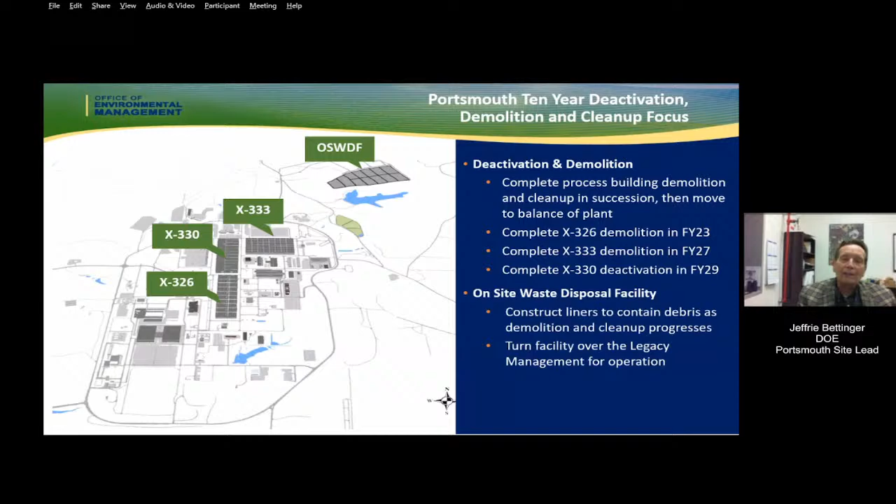And our goal is to complete demolition of the 326, and we're currently working on deactivating the 333 so that that highly skilled crew can just move right to that next facility.

These facilities are mostly structural steel, concrete. There's a lot of electrical switchgear in them, so there's just that sheet metal that's involved in those. And so we're taking all of that and we're taking the big pieces and making them into small pieces. Same thing with the piping that's in there. We're able to do that.

Sometimes you'll see other demolitions and they'll just use fire hoses. Lessons learned from other facilities are that these are much more effective. We can also add material to this to make it work better, we call that fixative. The biggest thing we strive to do when we're doing this demolition is to do it safely from a physical point of view, but also to keep the dust down because that controls any contamination from leaving. We've sprayed fixative in the building in a lot of areas, and then we've sprayed fixative on the transite, which is the asbestos sheeting on the outside.

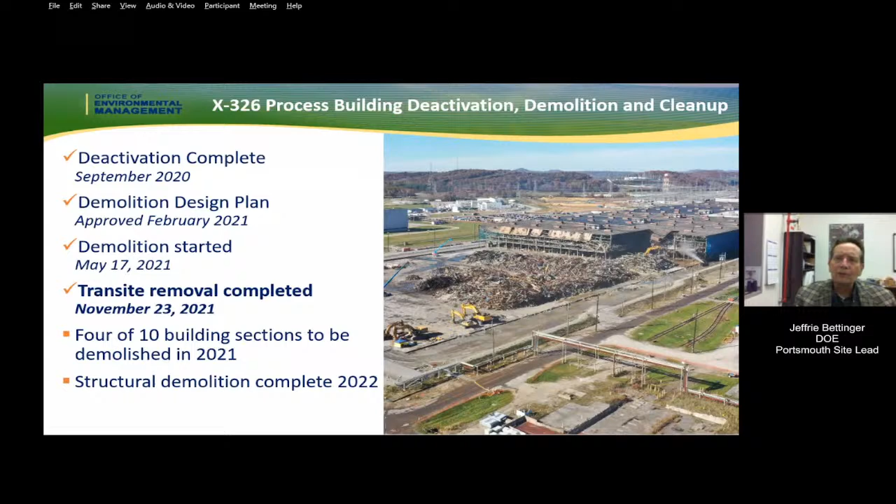Could I have the next slide, please?

When we take this material up to the on-site waste disposal facility, it's a bunch of irregularly shaped material. Beams, things like that. There are size criteria for them, but when you put them into the on-site waste disposal facility, there's a lot of void space. And that's not a good thing, because when you have the void space, it means that things will settle in the long term. So what we do is we put soil in there, engineered fill. It can't just be any kind of soil. We like soil that's got a lot of clay in it, that meets the approved engineering criteria for that. We've worked with Ohio EPA to validate that the soil we have on site meets this criteria.

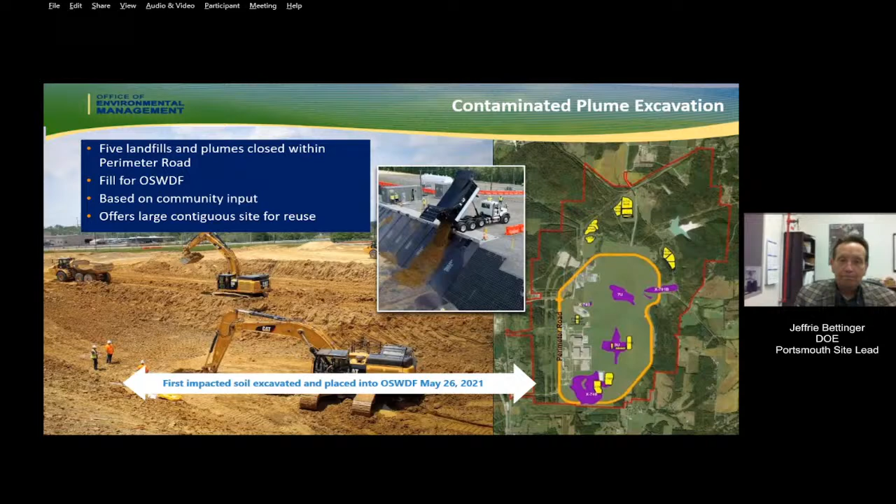And then more debris goes on top of that. It's like when we're baking a cake and putting different layers together. So that cell is actually active, and all the rainwater and any leachate generated from that is collected and treated prior to going to one of our permitted outfalls.

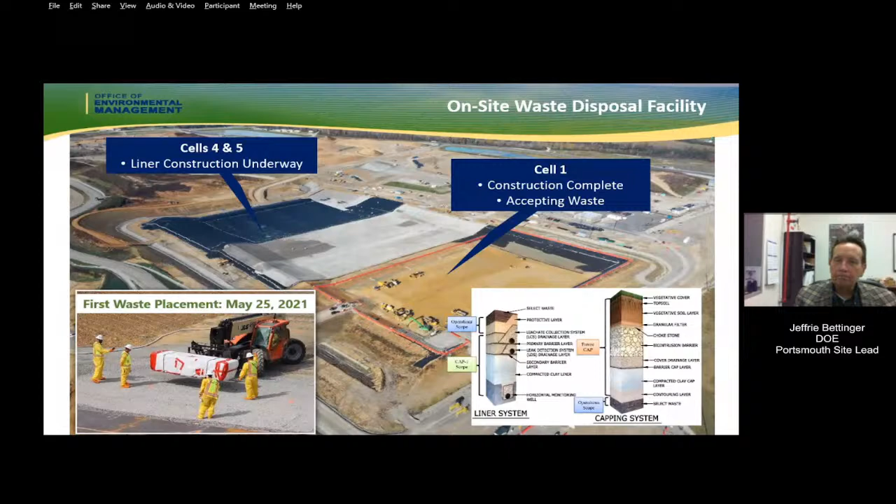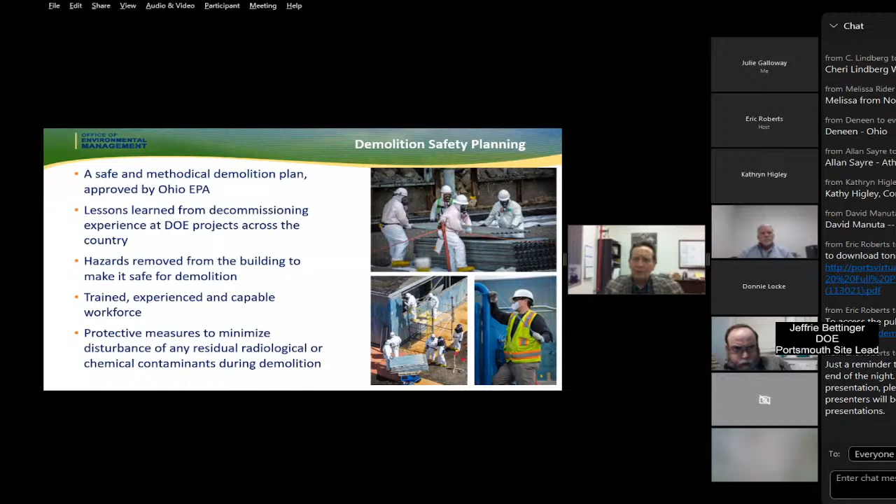So how do we get together and plan a job like this? Well, we're engineers, and what we do is we make a plan and then we work a plan. When we're putting our plan together, we rely on several things. We rely on our knowledge and procedures and things we're taught on how to do things properly. There's a lot of regulations, safety regulations, OSHA regulations, that guide us in doing this. But one of the main sources in most of these regulations and guidelines are lessons learned from other projects. That's why the regulations get updated, to incorporate lessons learned.

We have the advantage of being part of a large complex doing similar work in Oak Ridge and other places. They did take down the former gaseous diffusion plant in Oak Ridge, so it was a great source of lessons learned, and we take those and apply them. I mentioned a few: one was the use of fixative, which we use in higher concentrations than they did at Oak Ridge. We also put in that berm around the building that collects all the water from it. That was a lesson learned from Oak Ridge, to make sure we collect and treat it.

In addition, we did some things that are just common sense. We removed the hazards from the building to make it safer for demolition. We make sure we use a trained, experienced workforce, people who have been at the site for numerous years. They're familiar with the way we do business and the high safety standards we use. That trained, experienced workforce is a definite asset in everything we're doing here. And as I say, we have these protective measures that we use.

Could I have the next slide, please?

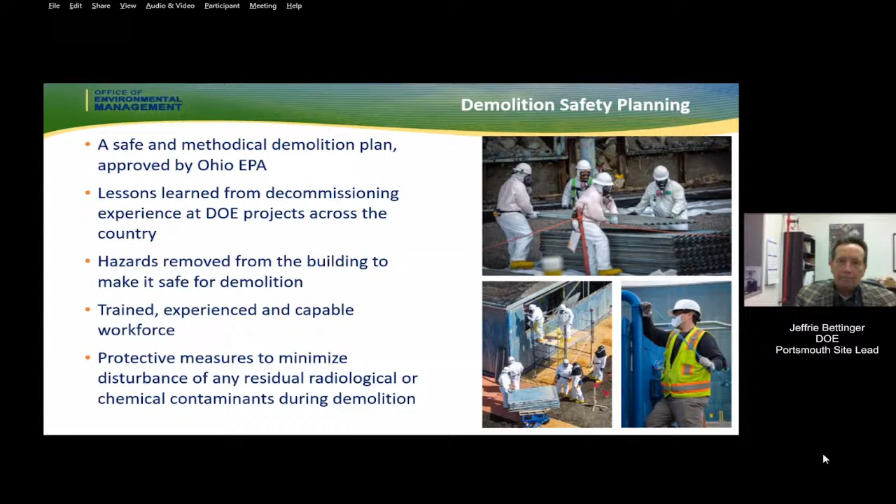It's great to make a plan, but you have to check it. We have a saying here: trust but verify. What I want to talk about is the way we're verifying that we're bringing this building down safely and controlling any contamination through monitoring.

We spoke a lot last month about some of the real-time monitors that we put in. Frank talked a lot about it, and he's going to talk tonight about some of the other monitoring systems we have in place.

We put these in as a layer. Kathy's going to talk later about the philosophy of this, but we monitor close to the site, mid-range from the site, and at the perimeter of the site. So we have multiple layers of monitoring.

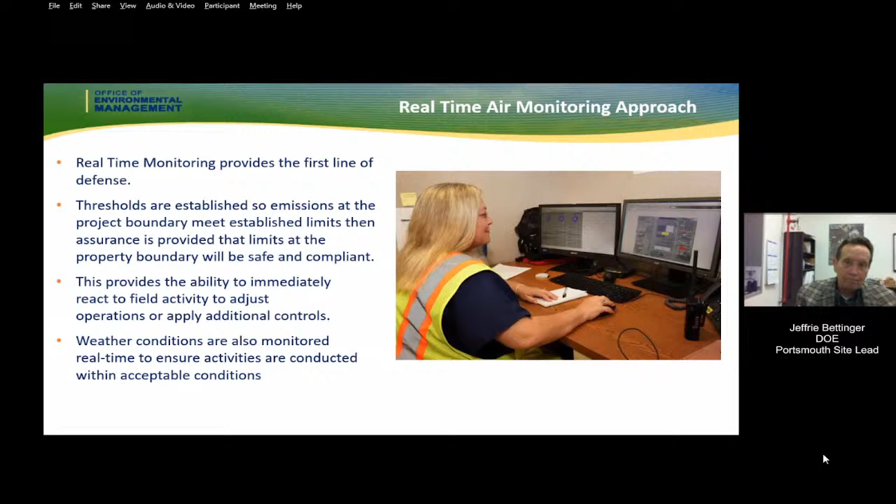All the data we've gotten since we started demolition has shown we're doing a good job controlling dust. We're monitoring for that with particulate matter and finding we have good control. The water and fixative applications are effective.

We're also monitoring for radiological releases with some real-time measurements, and it shows we're being protective of workers—the detection limits are minuscule, if anything at all, in what we're seeing. Could I have the next slide, please?

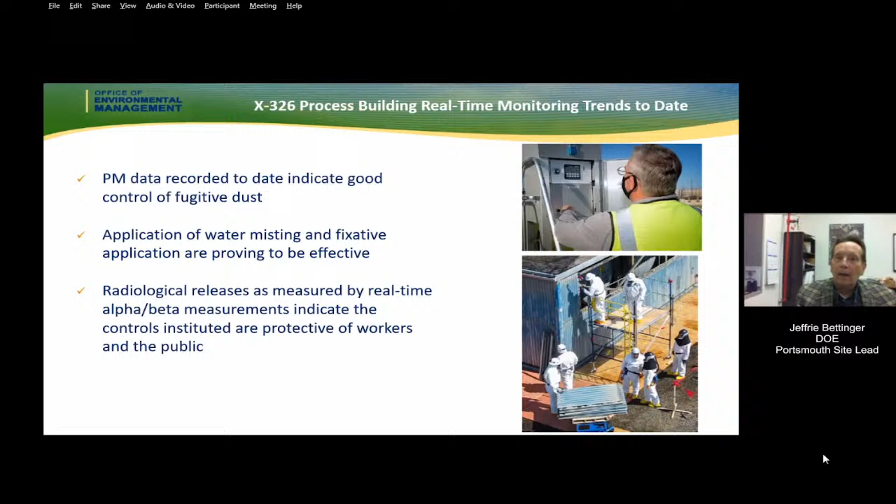Now what Frank's going to focus on tonight is the co-located monitoring system. A couple of years ago, when we were getting ready to start this, we got together with the Ohio Environmental Protection Agency and the Ohio Department of Health and proposed to co-locate monitors here so they could do an independent verification of what we were doing when we were sampling, so the public could get data from their trusted representatives within the state.

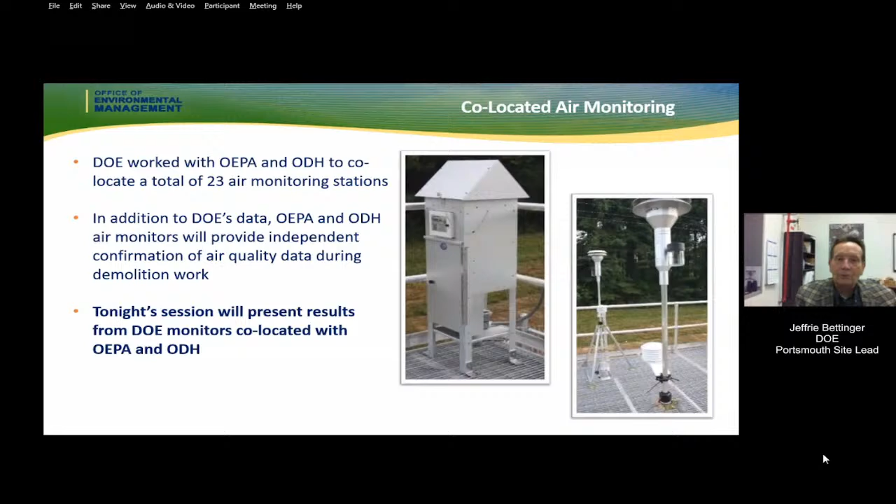So we actually installed 23 air monitoring stations to provide this independent confirmation. Frank's going to talk about what some of the data has shown, and a little more about what those monitors are and where they're located. And with that, I'll turn it over to Frank. Thank you.

Okay, thank you, Jeff. My name is Frank Johnston. I'm the Director of Environmental Protection for Fluor BWXT.

Jeff did provide a good intro into what we're going to talk about tonight, because we did spend some time back in October, our first couple of public meetings, talking about that real-time data—not only what the performance was telling us, which was that it's been pretty good so far, but how we were using that real-time data to control our activities, since that gave us insight into when we might need additional controls or improve the controls that were there. So we spent a lot of time talking about that real-time data for particulate matter as well as for some of the radiological constituents.

As Jeff said, tonight we're going to expand our focus a little bit. We're going to look at some of the monitoring systems we have beyond the project boundaries. We'll get into that here in my section of the presentation.

So just a little bio, a couple of bullets there. I've had 37 years of experience. I'm a chemical engineer by degree, worked in the environmental field all my professional career, 31 years on demolition and environmental remediation projects similar to what's going on here at Portsmouth. I've been working at Portsmouth since the beginning of our contract back in March of 2011. Next slide, please.

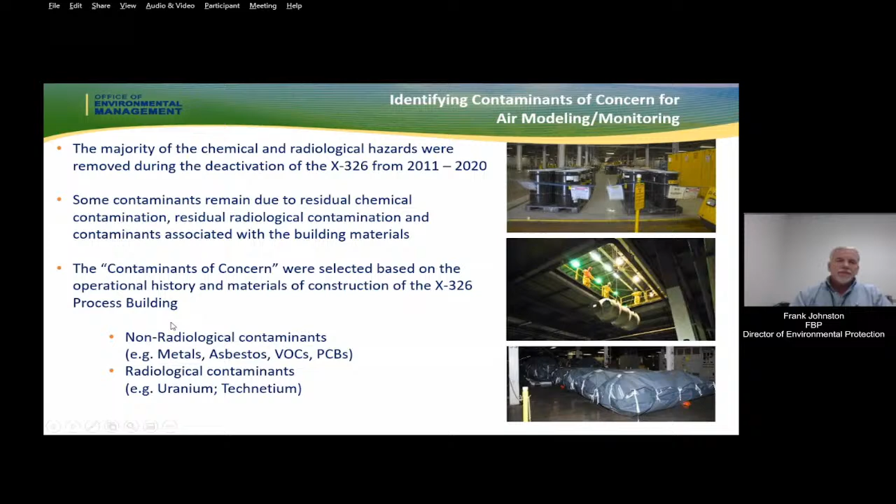So during the demolition design effort for the 326, we did a comprehensive air modeling effort. We didn't look at just the sources of our contaminants, like the demolition facility, the demolition project, and the on-site waste disposal facility, but we also looked at the cumulative impact from all these activities - what was going to be the impact on-site as well as at our property boundary and off-site. So we did an extensive air modeling effort to determine our impacts, and we concluded that with the proper controls, we could successfully do these activities and meet the regulatory requirements and environmental standards we needed to meet at the fence line and beyond.

This air model was peer reviewed by an independent expert brought in by FBP. It was also reviewed by an independent expert brought in by the Department of Energy. We provided this air model to Ohio EPA for their review, and they approved that model on May 20, 2020. So that model demonstrated we could meet our requirements, but we were also using that model to develop the air monitoring program we're currently implementing.

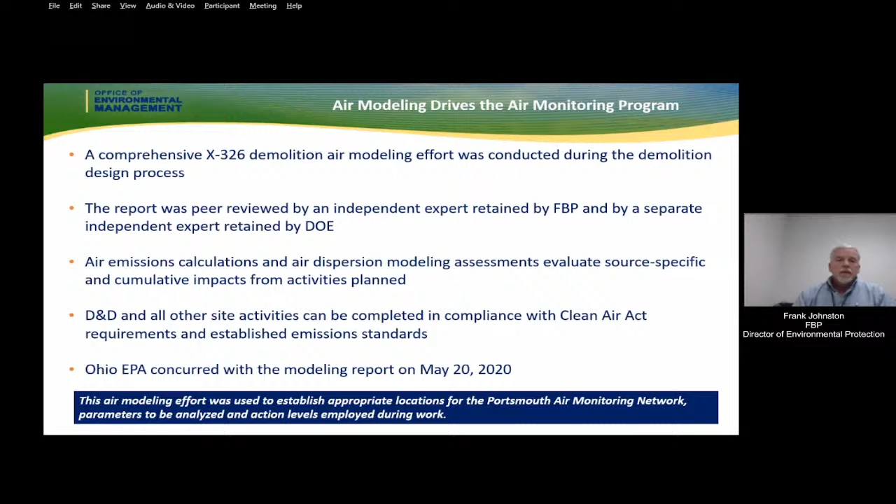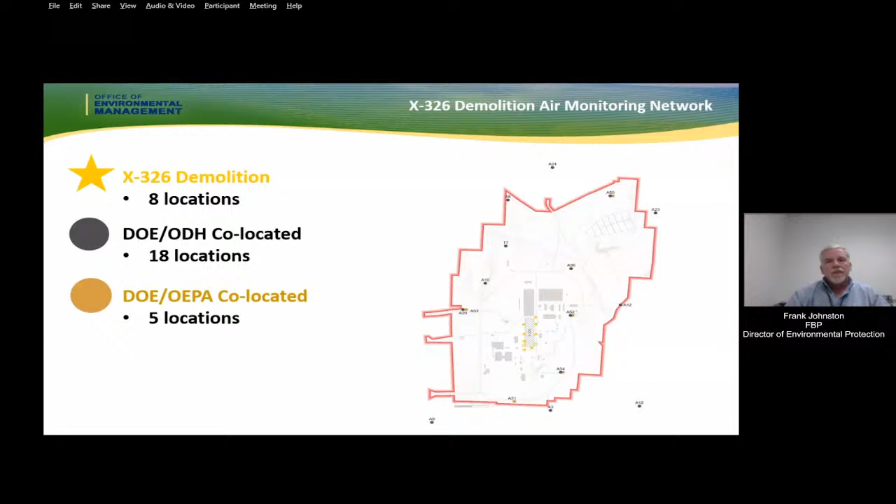So co-located monitoring is exactly that - when I say co-located, the sampling devices are literally right next to each other. The Department of Energy, the Ohio Department of Health, and the Ohio EPA have come together and installed these monitoring stations. It provides redundancy in the air sampling to help confirm that our air emission impacts from on and off-site activities are consistently measured. It provides regulators, our public, and important stakeholders an independent mechanism to evaluate all the air emission data collected, and it provides an increased level of transparency with state regulators as well as our neighbors and stakeholders.

The Department of Energy stations we'll be discussing have been there for years and years. The Ohio Department of Health has just recently co-located their stations next to the Department of Energy stations.

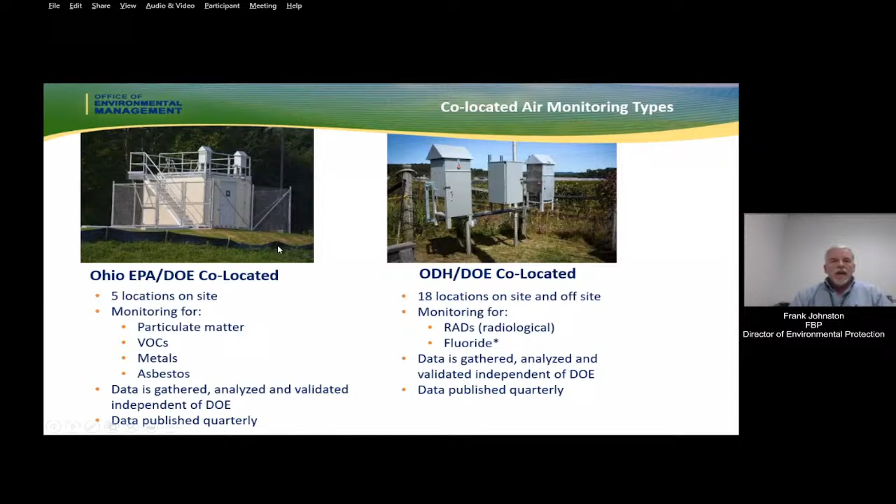So we've got quite an extensive collection, validation, and reporting process for the analytical data we're going to discuss tonight. I don't want to go too deep into this, but I do want to give some indication of the process it takes to produce data that can be reported and used for determinations of compliance, for determinations of protectiveness, and for our various websites and reporting mechanisms.

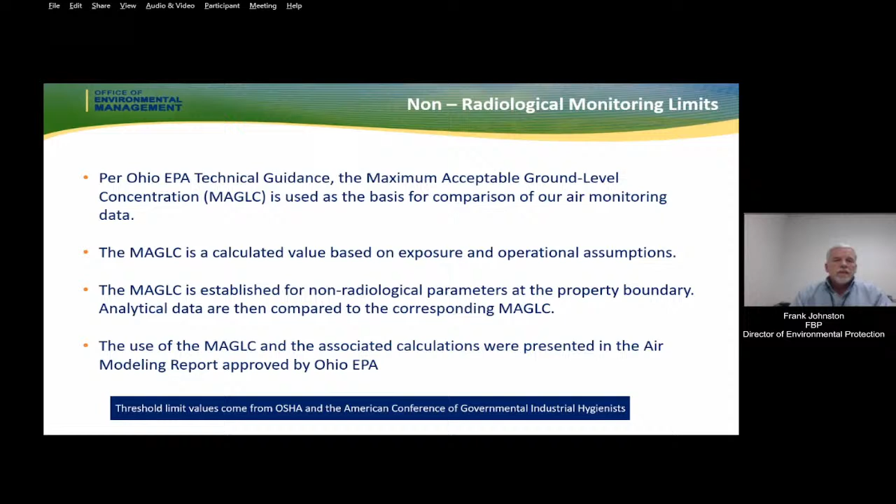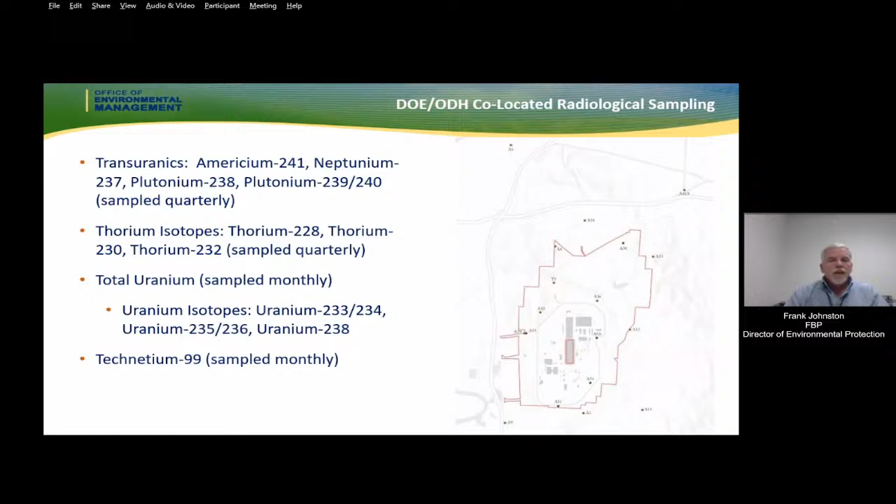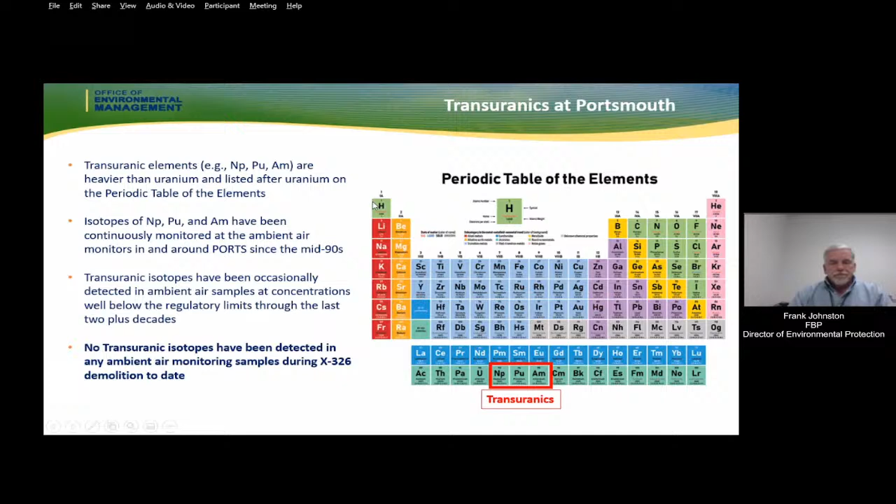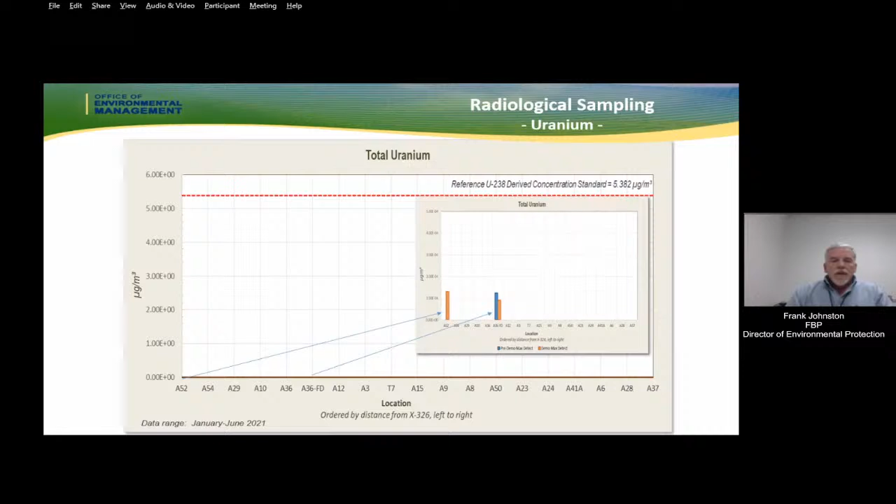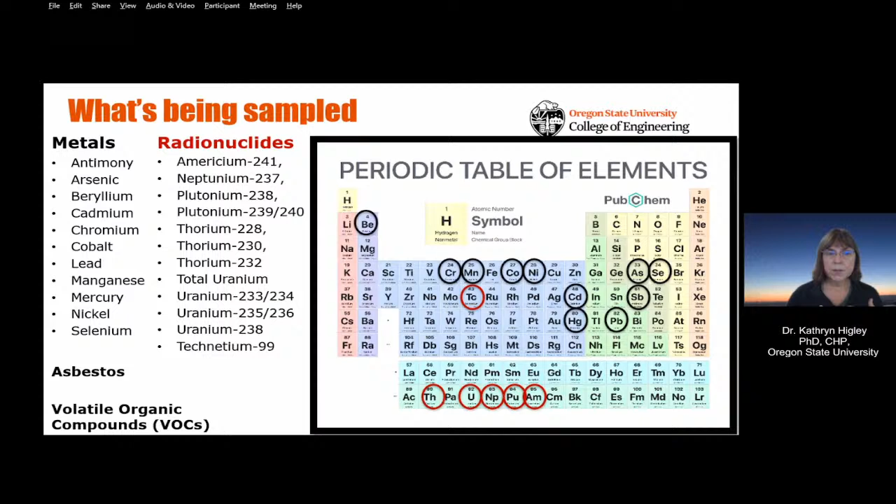So that includes thorium, uranium, then the transuranics - beyond uranium - neptunium, plutonium, and americium. And oh, by the way, up in the middle of the periodic table is also technetium-99, which is one of the constituents that's being considered.

So in doing the sampling and monitoring, in addition to using the wind roses to figure out where to place your sampling stations and make predictions of what the concentrations are going to be, you also have to understand what the possible contributors to the sampling results are. You have site activities that can contribute to the data you're collecting, but there may also be natural or human-caused sources outside of those activities, the deactivation and demolition activities, maybe from other activities on site, or in some cases it's simply the underlying geology of the site.

A number of these metals are distributed all over the place just because of the type of rock and soil you have around your area. Similarly, human activity, whether it's driving cars, having coal plants, or electronics being handled, may contribute to a signature you need to be aware of when analyzing the data you've collected.

Radionuclides are the same thing. Uranium is naturally occurring in addition to having been used at Portsmouth, so you need to be mindful. Are there natural sources? There are mining activities. Uranium can occur in fertilizers, for example, which might not be well recognized. Technetium, which is definitely produced in the fission process, can be distributed because of fallout, and also a tiny amount of it can be created through natural processes as well.

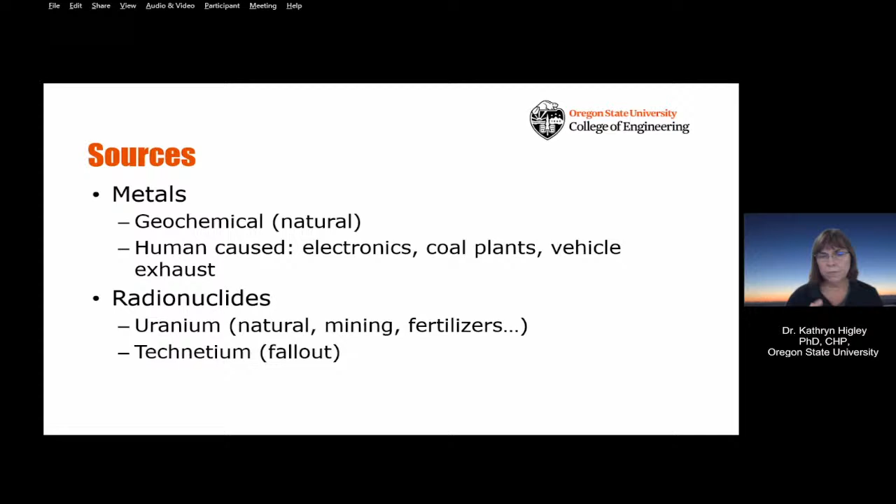Next slide, please. So when we're looking at radiation and radiation sources, for example to understand what is taking place at the site, you need to be mindful that radioactive materials, natural sources of them, are all over, and they vary as a consequence of the underlying geology.

So, for example, if you're in Denver, your dose rate could be twice as high as if you're in Ohio, just because of cosmic radiation. All of those natural sources, on average in the United States, give us about 300 millirem a year. Some people will be much higher, some a lot lower. On top of that, medical doses, on average in the United States, give us about 300 millirem a year as well—it may depend on whether you had a lot of dental work done, broke a couple of bones, had a lot of X-rays, or maybe a CT scan. So the background, both natural and from medical sources, is around 600 millirem per year to people on average in the United States.

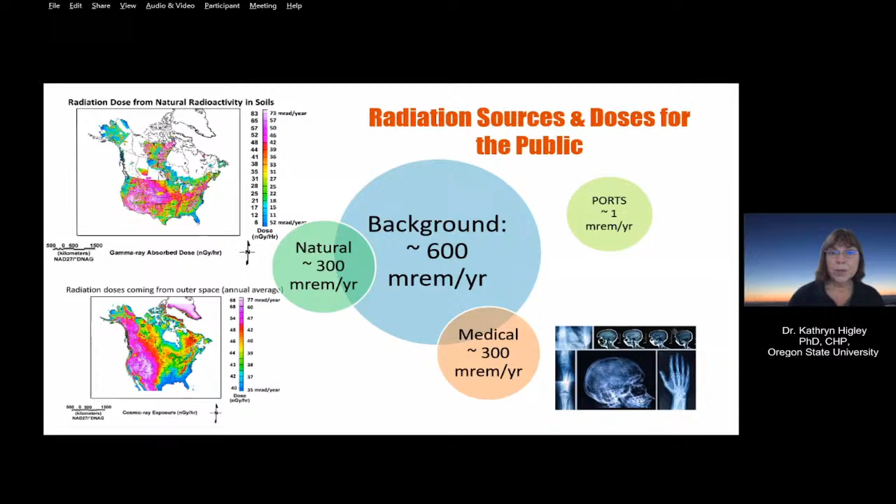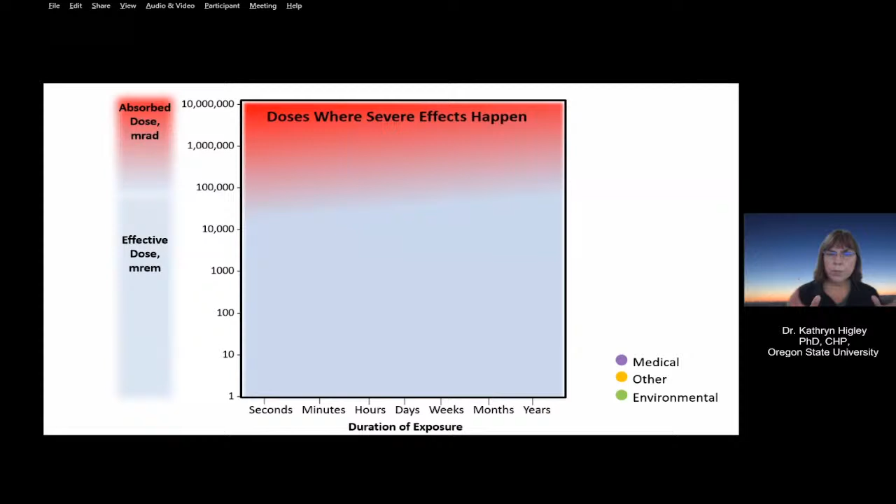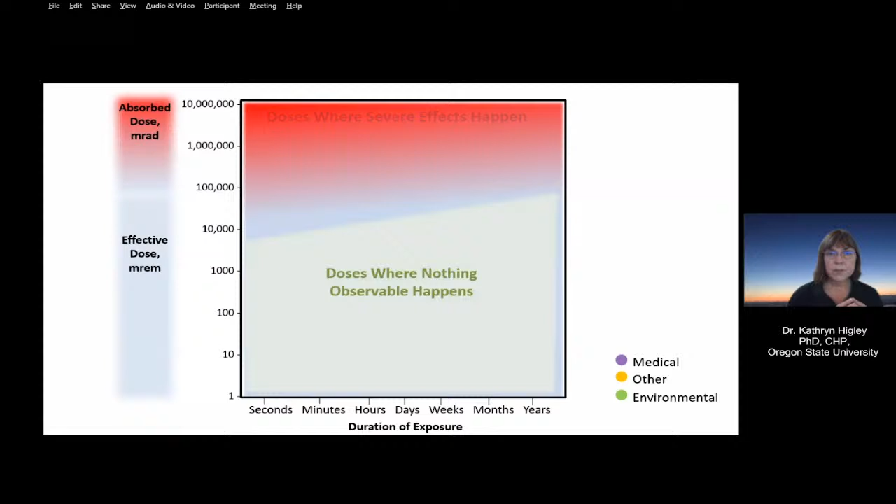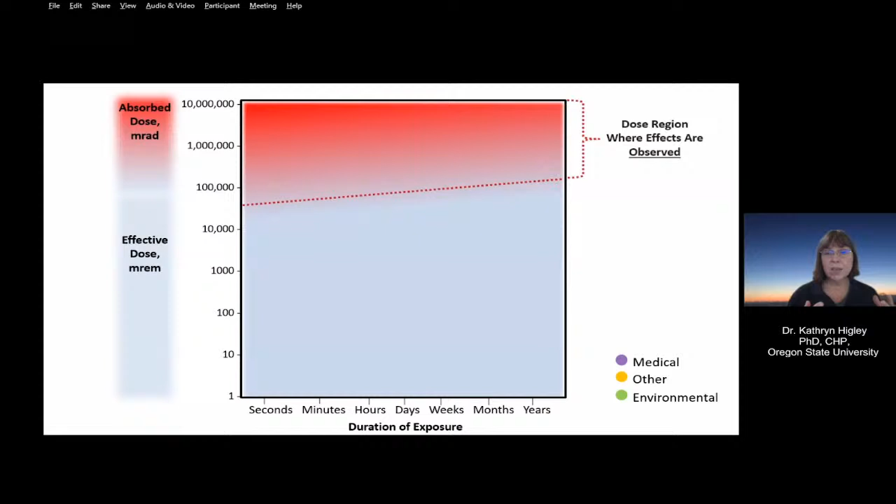We know in really high doses and high dose rates, there are severe effects. In really low doses and low dose rates, we don't see any observable effect. So how do we manage this kind of information? In the high dose rates, in the 10 million millirad range, for example, we can see skin burns, death, cancers. In the really low dose regions, though, less than about 10,000 millirem, we have to calculate it using mathematical models. That's where the natural environmental exposures sit. That's also where diagnostic procedures like x-rays sit. But you have therapy, radiation therapy for cancer treatment, for example, that's in a high dose region because you're killing cancer cells.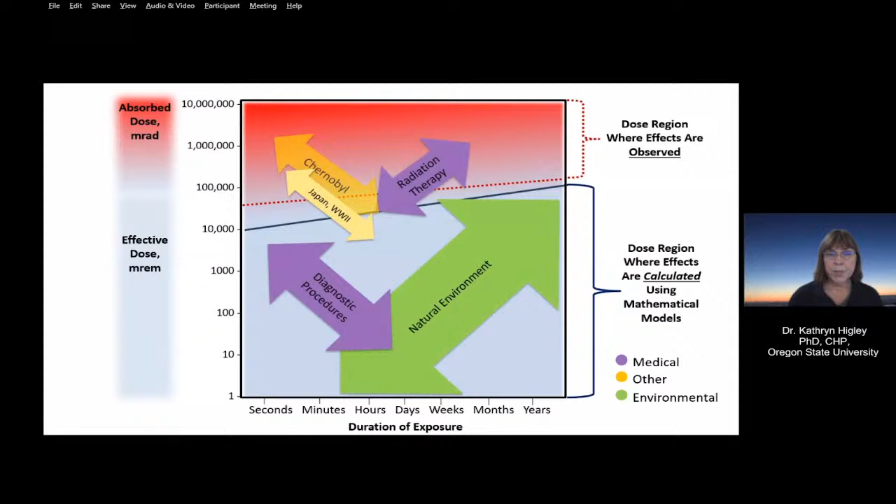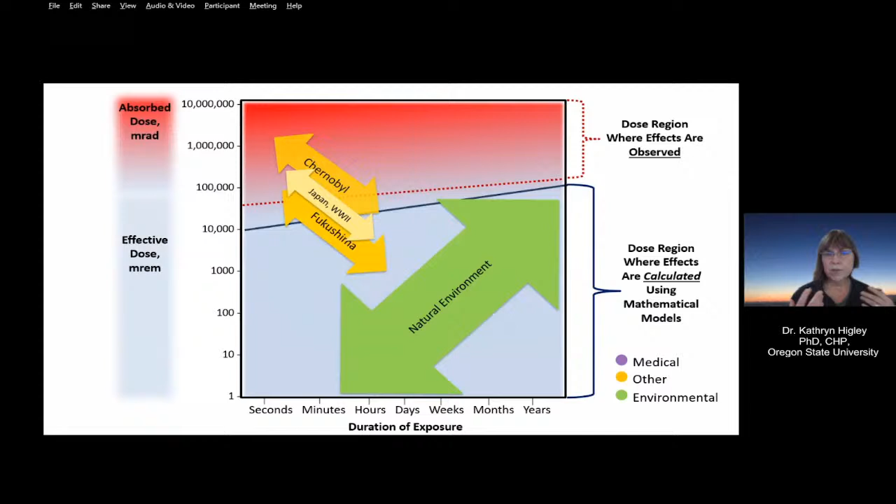We understand the risk because we look at data from Japanese atomic bomb survivors, people exposed during the Chernobyl accident, to a lesser extent from Fukushima, and all the information we gain from radiation therapy, diagnostics, and other groups where we develop our models for exposure. So again, the natural environment, we calculate effects using models. And if you look at the really, really low dose region, that's typically where your cleanup goals are for DOE sites. In that region where we don't observe effects, we can calculate impacts, but we don't observe effects in the population. Next slide, please.

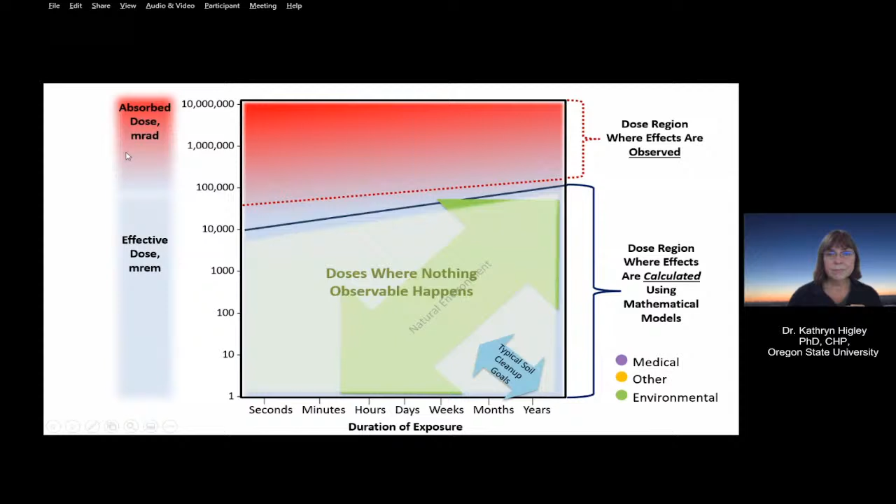So again, going back to how you achieve this endpoint for managing risk: you have these underlying requirements that tell you what you have to do to protect your workers, what you have to do to protect the public, and what you have to do to protect the environment. These are the standards for protection that are out there. As Jeff talked about early on, this process is pretty arduous and thorough, where you take a very hard look at what you want to do, you analyze it, you plan again, and then you implement it. With regard to the air monitoring efforts, they pick the monitoring locations for safety and relevance based on what they've learned about how wind and air moves across the site. Once they understand this, they start their process for deactivation, decommissioning, and deconstruction, and ultimately release the site for redevelopment. Next slide, please.

So the big takeaway is that the acceptable risk varies, and this depends on whether you're wearing your hat as a worker, recreating, or just generally living in the vicinity. The important thing is the goal of remediation of this site is not to eliminate all risk from the site, but to reduce it to a level that meets the requirements for workers, public, and the environment. Safety is integral and always has to be part of the consideration.